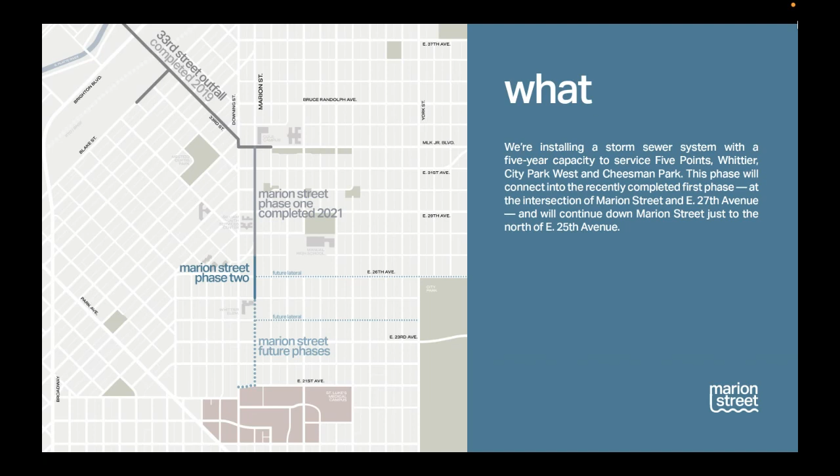We will be tying our new storm system into the recently completed Marion Street System Phase 1 project, just to the north of the intersection of 27th Avenue and Marion Street, then continuing down Marion Street just north of 25th Avenue. This previous phase, along with the completed 33rd Street outfall project, takes stormwater that enters the system along Marion Street, MLK, Downing Street, and 33rd Street, and eventually dumps the water into the South Platte River.

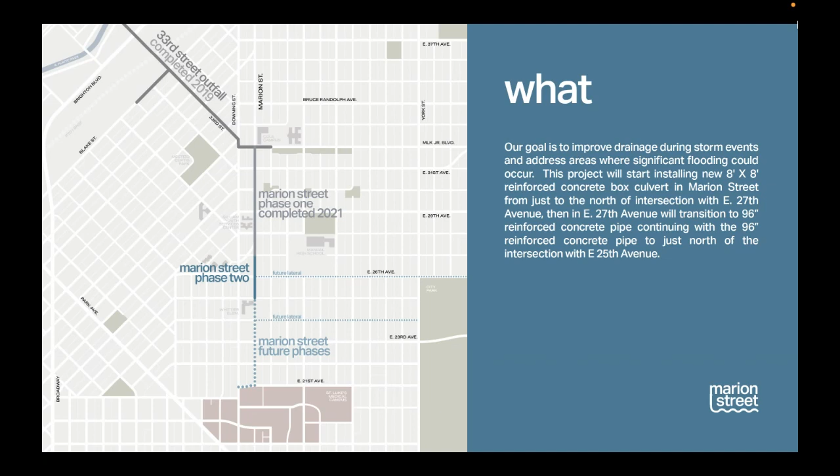Next slide. So the Marion Street system will eventually consist of new storm infrastructure running down Marion Street from MLK all the way down to 21st Avenue, where the City of Denver will tie the new infrastructure into existing infrastructure in Downing Street. It's at this location, 21st and Downing, that there is a pinch point where the new development ties into existing 100-year-plus old infrastructure in Downing that is a major contributing factor in flooding in the neighborhoods previously identified. The Marion Street system, once completed, will resolve this pinch point.

Same slide. Today, we're here to specifically discuss the second phase of the Marion Street system. This phase will extend from just north of 27th Avenue to just north of 25th Avenue. The remainder of the Marion Street system will be built in one or two additional phases in the coming years, depending on funding and completion of design.

Phase 2 of this project will install a new 8x8 reinforced concrete box culvert in Marion Street, just north of the intersection of 27th Avenue. Then in 27th Avenue, we will transition to a 96-inch reinforced concrete pipe, continuing with the 96-inch reinforced concrete pipe just north of the intersection of 25th Avenue.

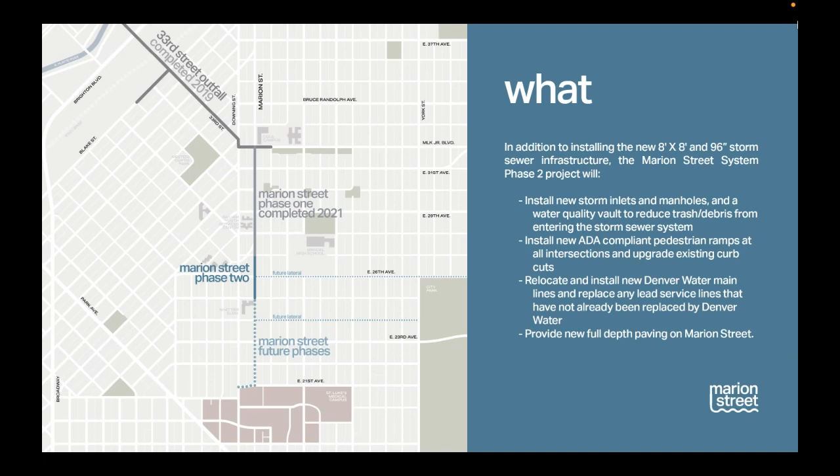In addition to the storm sewer infrastructure upgrades, this project will also upgrade all pedestrian ramps to current ADA and City of Denver standards, upgrade all existing curb cuts to current City of Denver standards, relocate and install a new Denver water main line, replace any existing lead service lines with copper lines, and provide new full-depth asphalt paving on Marion Street and at the 27th and 26th Avenue intersections.

Initially, while construction progresses from 27th Avenue towards 26th Avenue, Marion Street from 26th to 25th Avenue will also be closed down and used for material storage, and for safety reasons there will be no parking allowed in that area. As BT's operations move sequentially from just north of 27th Avenue through 26th Avenue and down just north of 25th Avenue, the material storage will then shift to Marion Street between 27th and 26th.

Any given block should anticipate being under some form of active construction or material storage, and therefore being closed to vehicular traffic for the duration of the project. We will always maintain walk-up access to your residence from Marion Street. 27th Avenue and 26th Avenue will never be closed at the same time, and there are no plans to close 25th Avenue during this phase of the project.

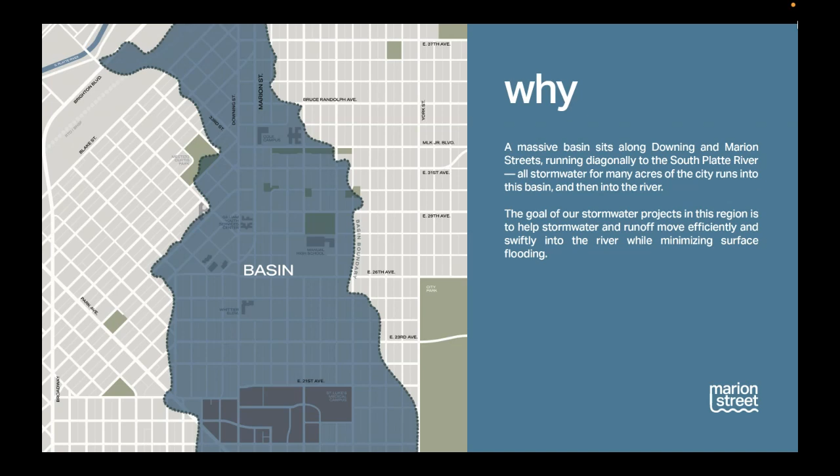As the area has been developed, areas that were earth were replaced with impervious surfaces, such as asphalt and concrete for roads, parking lots, buildings and houses, which are also considered impervious. The more impervious surfaces we have, the more water runs down the streets and parking lots, and less water is absorbed into the ground. The goal of this project is to help stormwater runoff get into the storm system and off the surface as efficiently as possible.

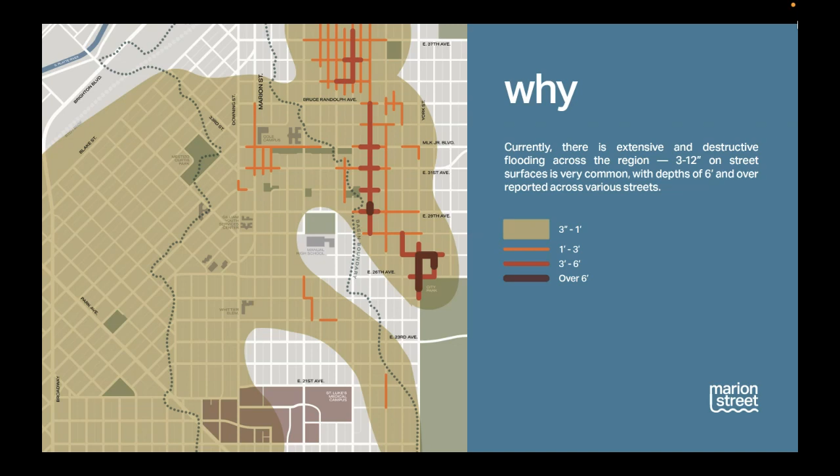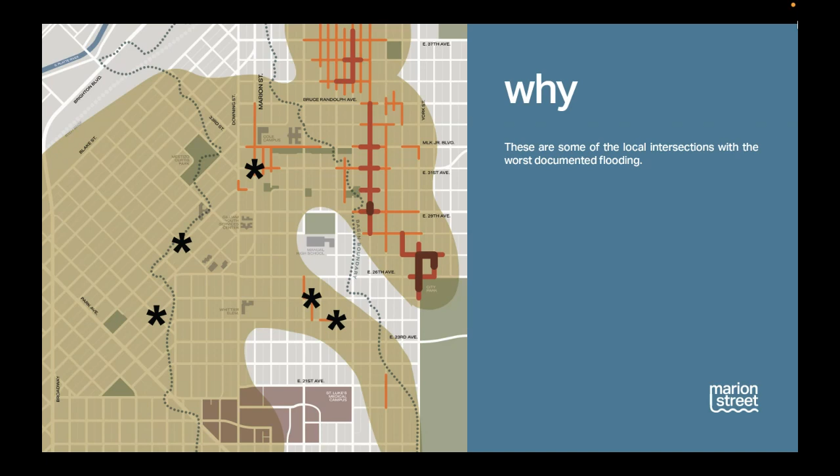Here you can see additional areas in the basin that experience flooding, sometimes as much as 6 feet in certain areas. And here's another slide highlighting some of the worst reported flooding areas on file.

On this slide, what we're trying to say is when you add all of the completed 33rd Street outfall systems and all of the upcoming and completed phases of the Marion Street system, you start to get an idea of how these infrastructure improvements will reduce the strain on the existing undersized storm sewer system in Downing Street from 21st to MLK.

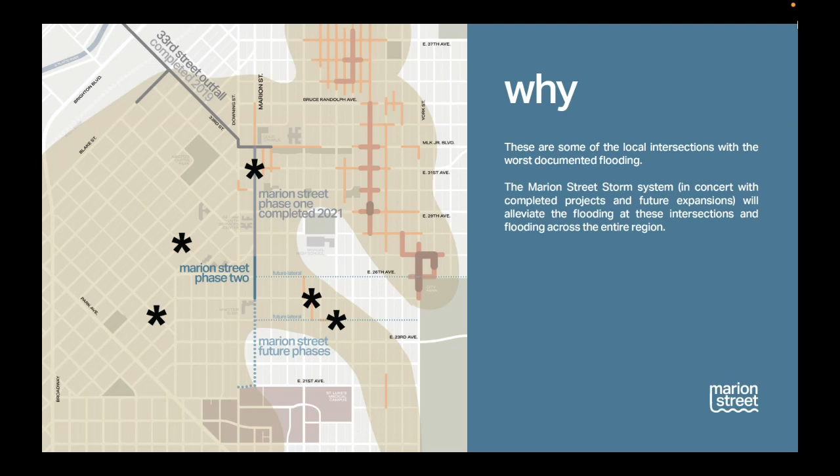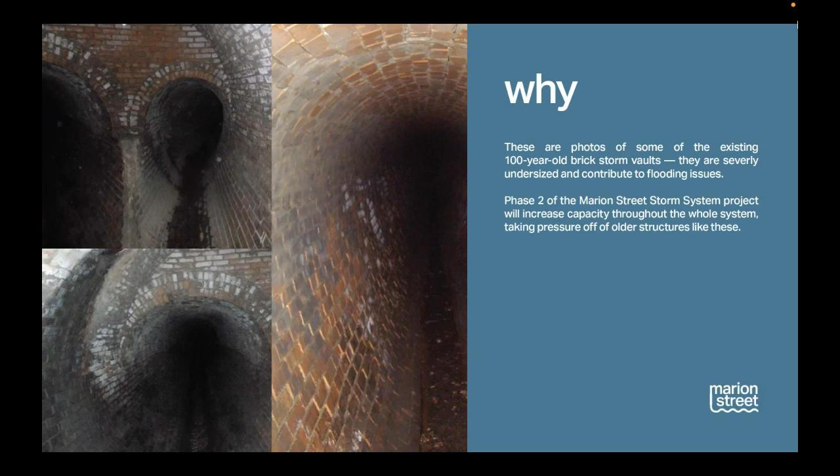By contrast, the new storm line being replaced down Marion Street will be an 8-foot by 8-foot tall concrete box culvert, which transitions to an 8-foot diameter concrete pipe. It will intercept the existing storm sewer lines in 27th and 26th Avenues coming in from the east that are 18 inches in diameter, which will further reduce the load on the brick storm line in Downing Street.

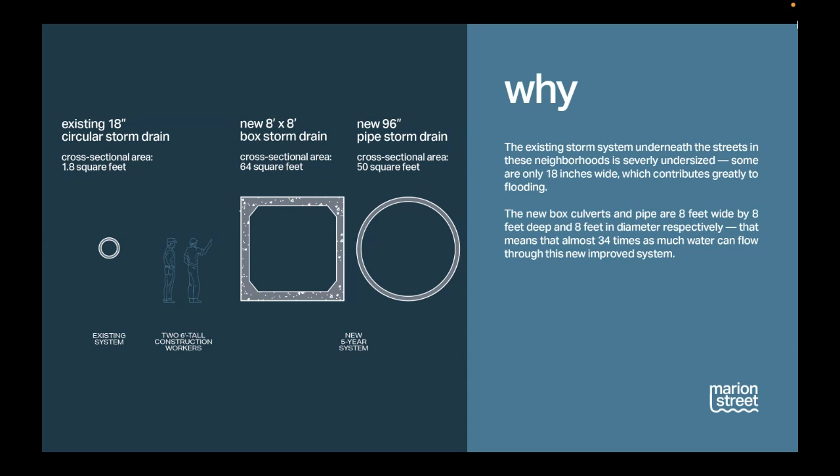Because of the size and depth of the excavations required to install not only the storm main line but the lateral lines connecting manholes and inlets to the main line, along with concrete flatwork and asphalt paving, it is not safe nor feasible for the blocks under active construction or material storage to be open to vehicular traffic. The reality is, if you live on Marion Street between 27th Ave and 25th Ave, you need to prepare yourself to not be able to drive to your front door or park on the street in front of your property for the duration of the construction project.

The street closure will also impact any occupant who has a driveway access off of Marion Street.

We will always maintain walk-up access to your residence or business from Marion Street. We will not be touching the sidewalk in front of your property unless you live on a corner or need to have a lead service line replaced.

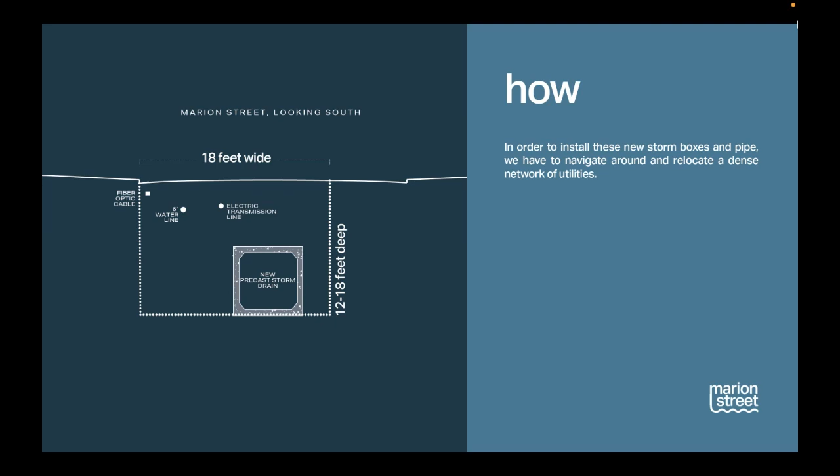As you can see, there is no way to safely maintain on-street parking or vehicular access to the blocks that are under construction. What was a neighborhood street will transform for a period of time into an active live construction site surrounded by barricades and temporary fence panels to keep the public safe and away from the equipment and excavations.

BT is contractually obligated to minimize their impacts to residents, businesses, and constituents. However, there's no way to perform the task they've been hired to do and eliminate all of the negative impacts that these individuals will be exposed to when it comes to an infrastructure project of this size.

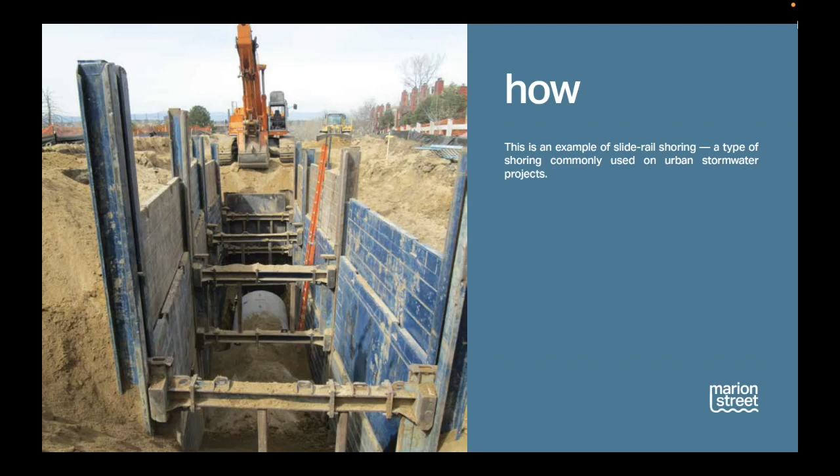So please let us hear from you. At the end of this presentation, please take the time to record the contact information, website address, project hotline, and sign up for the weekly newsletter. It will help to keep you informed and will proactively head off at least some of the headaches that come along with construction of this nature.

Getting into the where now. So one of those headaches that comes along with this project will be the detours of the streets that will be closed and occupied by BT during construction.

As we've gone over, Marion Street will be closed for the construction through the intersection of 27th Avenue to 26th Avenue. 26th Avenue will remain open while 27th Avenue is closed. But again, Marion will be closed between 26th Avenue and 25th Avenue for material storage.

Once construction progresses through 26th Avenue, 27th Avenue will reopen. Construction will continue down to 25th Avenue and material storage will then shift to the closed section of Marion between 27th and 26th Avenue.

When 27th Avenue is closed, the local traffic will be detoured to 26th Avenue via Lafayette Street or Downing Street. When 26th Avenue is closed, the local traffic will be detoured to either 23rd Avenue or 29th Avenue via Downing Street.

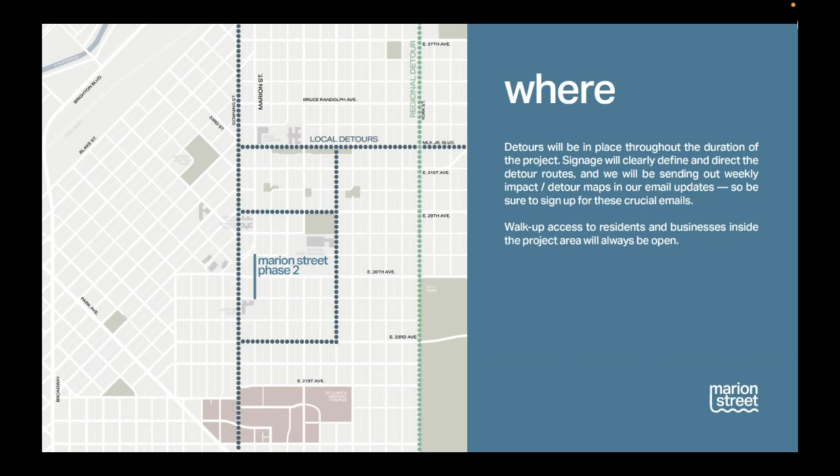We will always maintain walk-up access to your residence or business from Marion Street. And as BT develops and gets their traffic control plans approved, we'll be placing valuable information on the website and in the email updates to keep you informed of the changing conditions.

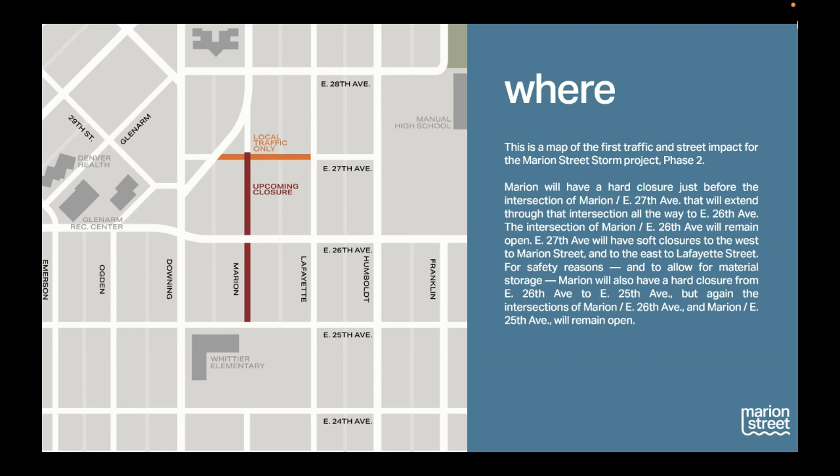Today, we have covered the who, what, why, how, and where of the Marion Street Storm Project. Now we will talk about the when.

The simple answer is that the contract period of performance starts on April 4th and will last for roughly 26 weeks, or 6 months. That puts the end of the contract in the October 2022 timeframe.

The entire project team, both BT and the City of Denver, will look to improve on that timing through careful planning and communication, but there are always unknown issues that arise in construction, particularly underground heavy civil construction, that could impact the schedule in a negative way.

Active construction is anticipated to begin in Marion Street just north of the intersection of 27th Ave in early April 2022. The period between now and the start of BT's period of performance on April 4th will be filled with communicating with property owners and occupants that live within 250 feet of the project limits.

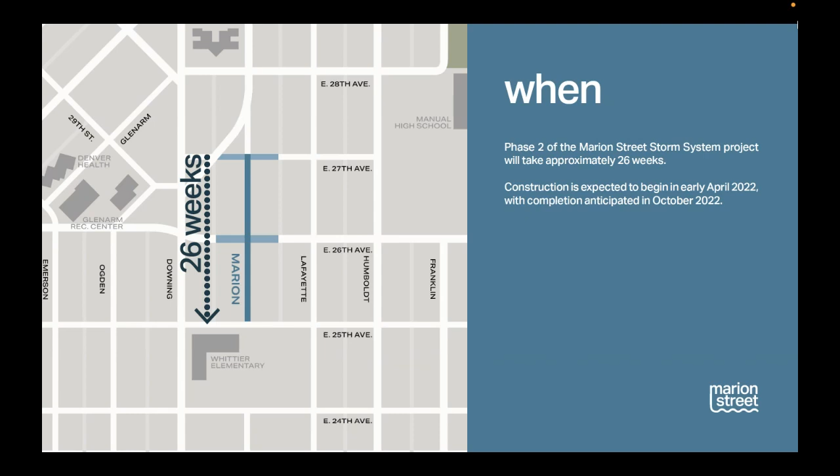This next slide has to do with construction vibration and what to expect during the course of the project. Another unpopular negative impact on a large-scale infrastructure project like this, with deep excavation, slide rail shoring systems, and large equipment, is there will be vibrations caused by construction activities that you will be able to feel.

Similar to road closures, parking restrictions, and detours, this is not something that can be eliminated in its entirety from the project. What we can do is monitor the vibration being caused by construction activities in real time and stop said activities before they reach a project-specific threshold established to protect adjacent structures.

Mike Donahue with Integrated Geotechnical Solutions is going to jump in here in the next couple of slides to talk more with the audience about the difference between vibration types and levels that your body can feel and experience, and those levels that can cause damage to structures.

Part of establishing this project-specific threshold is to require BT Construction to provide property owners within 250 feet of the project limits with an opportunity to have a pre-construction facility condition assessment performed on the structures at your property prior to any construction activity. This requirement is intended to provide both the homeowner and the contractor with a documented condition report of your structure prior to construction activities.

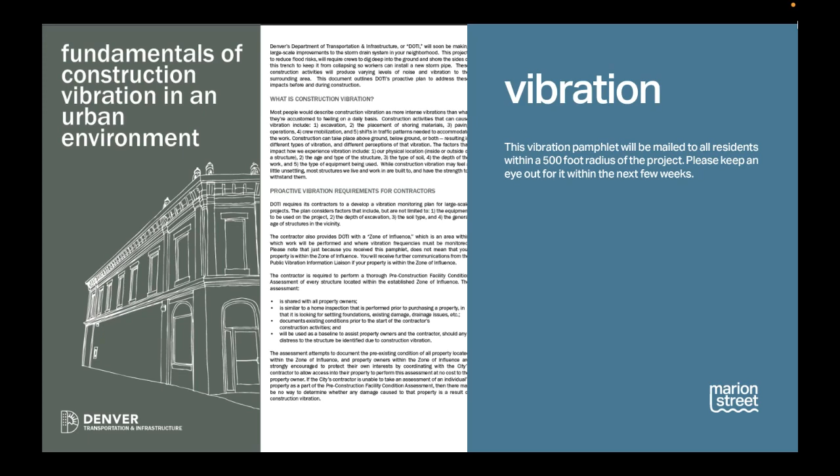This document will be distributed to every address within 500 feet of the project limits and contains additional information regarding construction vibration, proactive requirements the city has placed on BT Construction to monitor and minimize the impacts of construction vibration, and also things you as a homeowner or resident can do to help ensure you are protecting your property and valuables inside as well. Please keep an eye out for this document in the coming days and weeks.

It will be mailed to your address and be posted on our project website in the near future.

Before we hear from Mike, I would like to highlight some additional public outreach that the community should be anticipating from BT and Integrated Geotechnical Solutions in the near future. Depending on where you live, the outreach will vary. In general, these mailings and communication attempts will start on the north end of the project and move south towards 25th Avenue. If you live in a multifamily residential complex, there's a chance we've already spoken to your property owner regarding these communications.

They have directed us not to involve their tenants and to engage with their property management directly. If this applies to you and you have questions about the communication, please reach out to me directly by phone or email.

We have already sent out a project information postcard addressed to every address on file within 500 feet of the project limits. This postcard outlined how to get in touch with the project team members and how to best stay informed via the project hotline, webpage, and email updates. All of this information will be available again at the end of this presentation.

The vibration pamphlet on the previous slide will be sent out to all addresses within 500 feet of the project limits sometime this month. If you live within 250 feet of the project limits, you will receive a letter in the mail along with the vibration pamphlet requesting you schedule a pre-construction facility condition assessment.

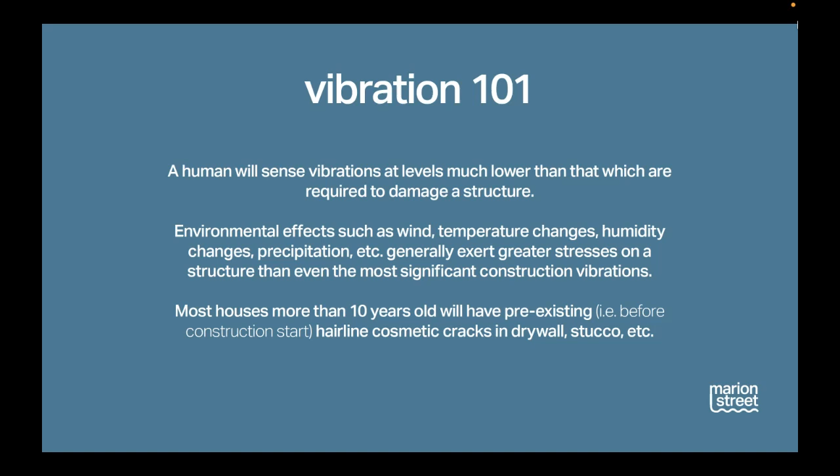We can feel vibrations as perceptible at 0.011 inches per second of peak particle velocity, the PPV. We note vibrations as severe at levels as low as 0.301 inches per second PPV. So you can see that's quite a wide range between what you're feeling and where we're experiencing severe vibration levels. A 20-degree temperature change can have an equivalent stress on a structure of up to 2.0 inches per second.

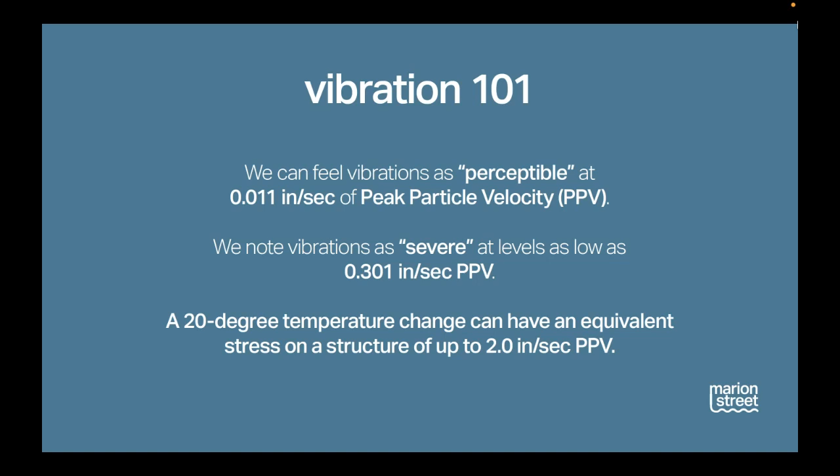So with that, if you see cracks forming in your home, it could be due to moisture coming in, and then it dries out for a period of time, and that could cause a crack. I guess that's what I'm trying to clarify there. So if you have follow-up questions, please keep them coming.

Yeah, some of these questions have probably already been answered. So first one, let's see, that's Dave. So we have a point of contact for any problems or concerns. I think we've all seen the contact info for everybody.

When does Marion Street between 26th and 25th Ave start? I guess the answer to that question is pretty much immediately, as we'll be using that area for material storage. We'll be able to park in the school parking lot. I can't speak specifically about the public parking in the school parking lot itself, but yes, the parking lot will be open during construction.